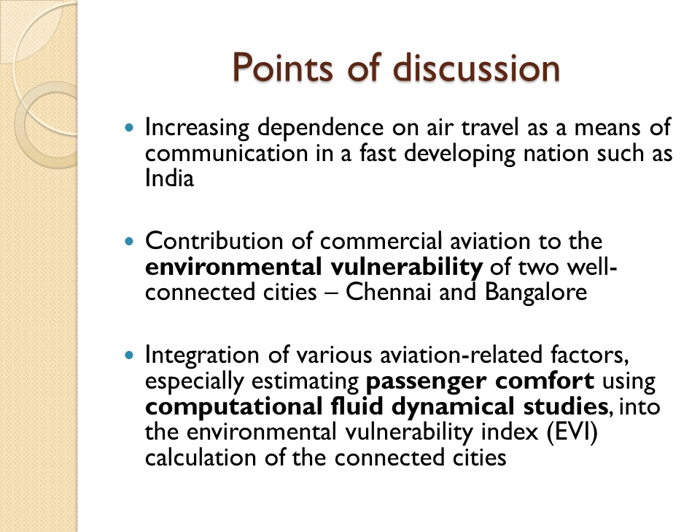In a fast developing nation such as India, there has been an increase in the dependence on air travel as a means of communication. Two well connected cities in India are Chennai and Bangalore. In this paper, we discuss how aviation related factors influence the environmental vulnerability of the two cities, and how passenger comfort can be included in the study using complex computational fluid dynamical studies, which is the first of its kind to be performed. Chennai and Bangalore are two cities in the southernmost part of India. The flight time between Bangalore and Chennai, or vice versa, is 45 minutes or so.

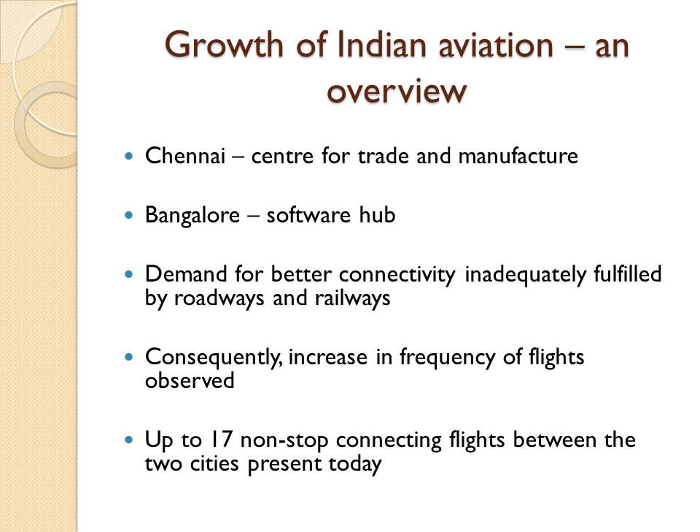There is a rising need for better connectivity between the two cities, Chennai and Bangalore. This is because Chennai is the center for trade and manufacture in the country, whereas Bangalore is a software hub. The demand for better connectivity has not been fulfilled completely by roadways as well as railways. Consequently, there has been an increase in the frequency of flights observed between the two cities. Up to 17 non-stop connecting flights are present today between these two cities.

This rising passenger traffic trend observed in both cities has resulted in an increase in the number of flights between the two cities, which has adversely impacted the environmental health of both these cities. This thus calls for an environmental impact assessment in order to examine the city's health due to the influence of aviation. This study delivers precisely this by using a modified environmental vulnerability index incorporating aviation related factors, which is depicted as a screening tool in this study.

An increase in the number of passengers traveling by air has resulted in passenger comfort being an important factor which airlines have to keep in mind. India, as many of you might know, is a monsoon driven country. We have the southwest monsoon for about 3 months of the year, whereas Chennai in particular bears the brunt of an additional northeast monsoon for about 8 to 10 weeks.

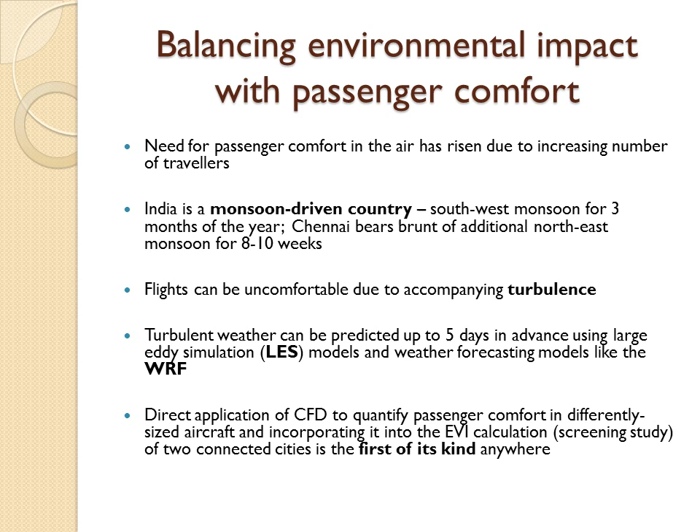Originally, the Environmental Vulnerability Index, or the EVI, was designed to quantify the vulnerability of a country or large bodies to environmental factors. There are 50 original factors used for this quantification. This original existing version of the EVI has been modified in the study to accommodate aviation related parameters.

The degree of vulnerability with respect to each indicator has been quantified as 1, as very highly resilient or least vulnerable, to 7, which is the most vulnerable. 7 out of these 50 given EVI indicators have been identified and used for this study, which have been influenced by aviation related factors, as we show later on.

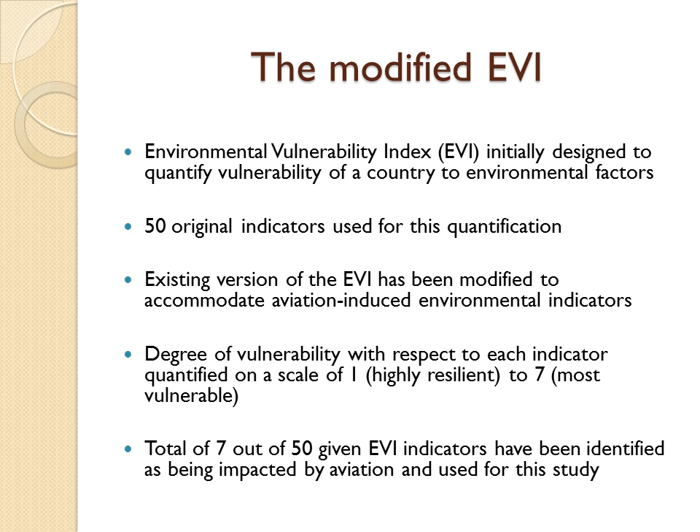As I mentioned earlier, the original EVI was proposed for large scale countries. However, quantifying the EVI of an entire country suppresses regional impacts of vulnerability within cities or states.

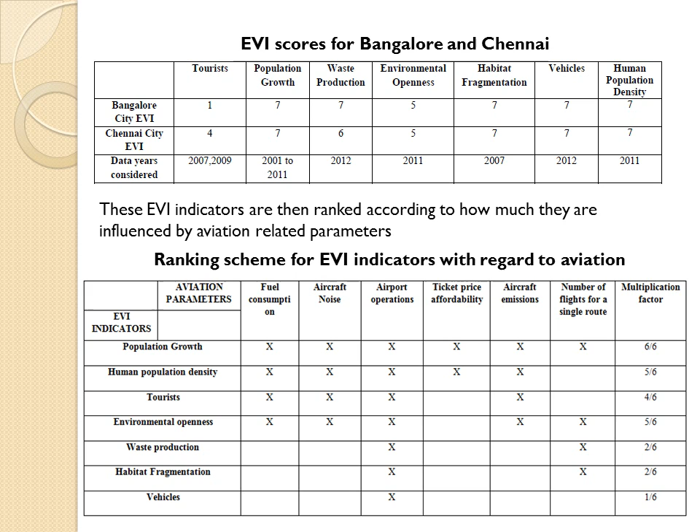given on the left. The final score shown by the multiplication factor is the number of aviation indicators influencing a particular EVI indicator. For example, all 6 aviation parameters influence population growth, which is an EVI indicator, and thus the multiplication factor assigned was 6 out of 6, which is 1.

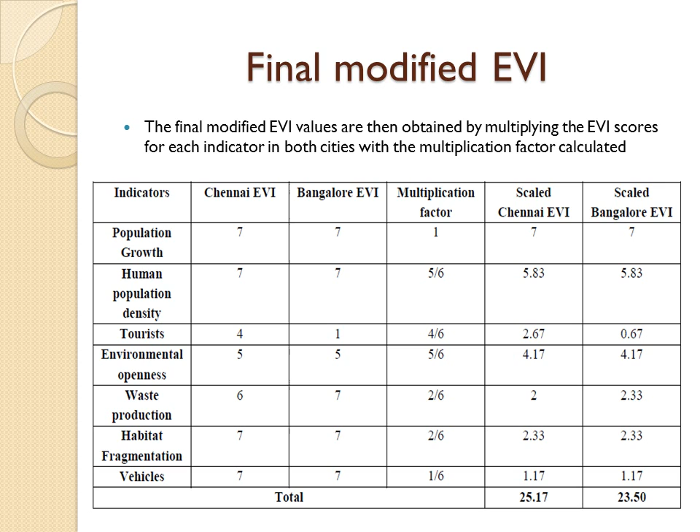The final modified EVI is calculated by multiplying the various multiplication factors obtained previously along with the EVI values for Chennai and Bangalore for the various EVI indicators. These scaled EVI scores are then added together to give the final scaled Chennai and Bangalore EVI scores respectively.

There are some telling implications of performing this modified EVI analysis. By reducing the impact of the aviation factors we observe on the EVI indicators, we observe that this reduces the environmental vulnerability of the two cities.

One possible way of achieving this is by reducing the number of aircraft operating on the route. This is possible by replacing a large number of small sized aircraft with a fewer number of larger aircraft.

This will ultimately lead to a reduction in the other aviation related parameters such as aircraft noise, operating costs, ticket prices, etc., and ultimately results in the reduction in the impact of most of the aviation factors on the EVI indicators. This ratio of smaller aircraft to be replaced by larger aircraft along this particular Chennai-Bangalore route is discussed based on passenger comfort. This is done by fluid dynamical studies as shown in the following slides.

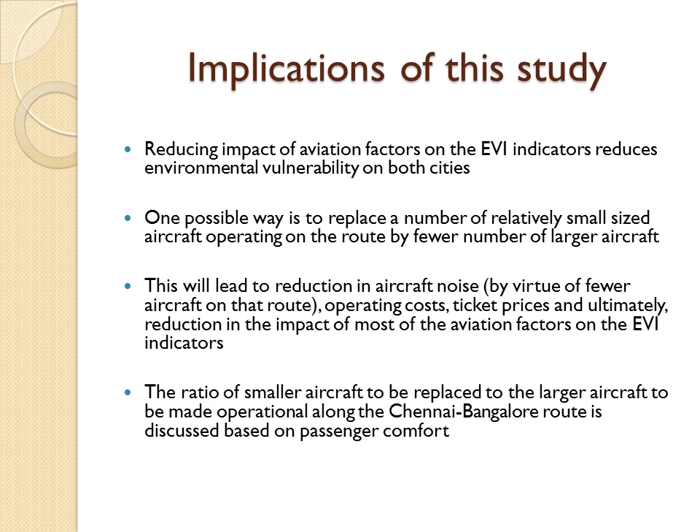In this section of the study, we introduce the aspect of human comfort in air travel. In order to understand the relevance of turbulence in commercial flights, it is necessary to perform a simulation of flow over a commercial aircraft. One of such commercial aircrafts operating on this Chennai-Bangalore corridor is the Airbus A320.

This simulation is performed with the aid of computational fluid dynamical software such as ANSYS CFX. In computational fluid dynamics, basically an iterative code is used to solve various fluid dynamical equations, mainly the Navier-Stokes equation, as well as other heat and mass transfer equations using boundary conditions which are input to the software by the user. A 1:33 scaled model of the Airbus A320 aircraft is used to analyze flow under ambient conditions.

One of the models used to estimate the type of flow and the various features is the K-omega SST model, which is coupled with a high turbulence intensity profile, and it is identified as the most suitable equation to analyze flow around the plane.

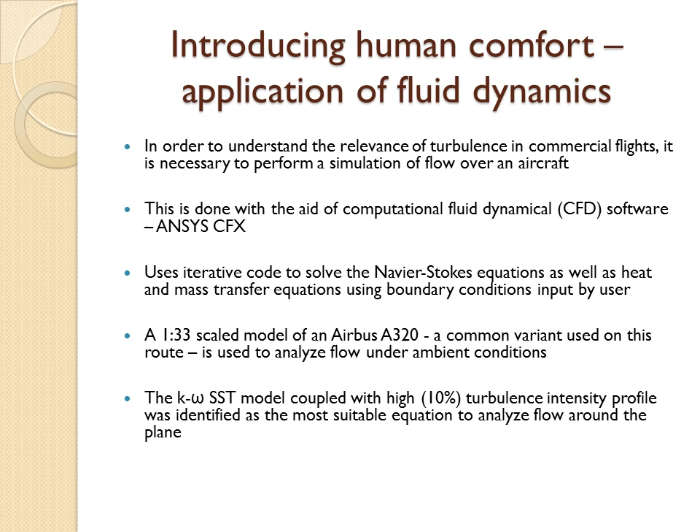Since the aircraft has to maintain a stable flight in the air, it makes sense that there is a higher pressure underneath the aircraft, that is below the wings, and a lower pressure above. This difference is observed clearly and is the reason for flight, as shown.

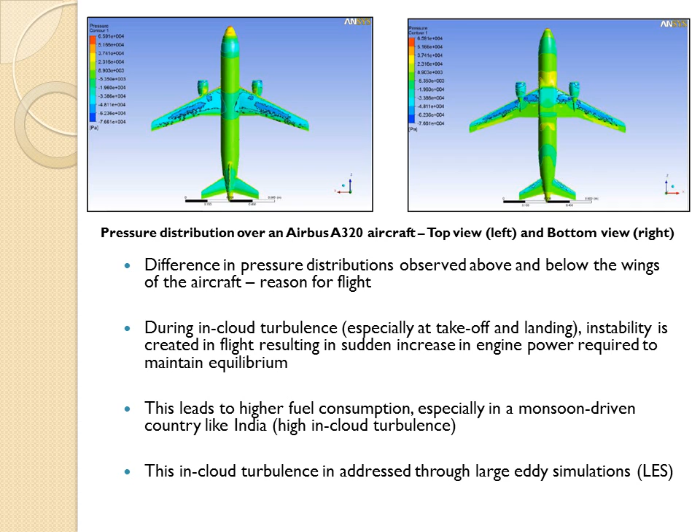During in-cloud turbulence, especially during the stages of takeoff and landing, high instability is created inside the flight, resulting in a sudden increase in engine power required to maintain equilibrium or to get back to equilibrium stage. This leads to an increase in fuel consumption at that moment, and this is more so especially in a monsoon-driven country such as India, where there is high in-cloud turbulence observed. This turbulence is characterized through large eddy simulations, which are showcased in the following slides within the cloud.

For this stage of the study, we use the UK Met Office large eddy model to compute large eddy simulations in order to determine the vertical velocity perturbations within a cumulus cloud, which is the most common cloud present at the particular height during takeoff and landing stages of the flight. Two different days in Chennai city are examined, one during a normal condition, a regular day, and another during extremely turbulent conditions such as during a cyclone.

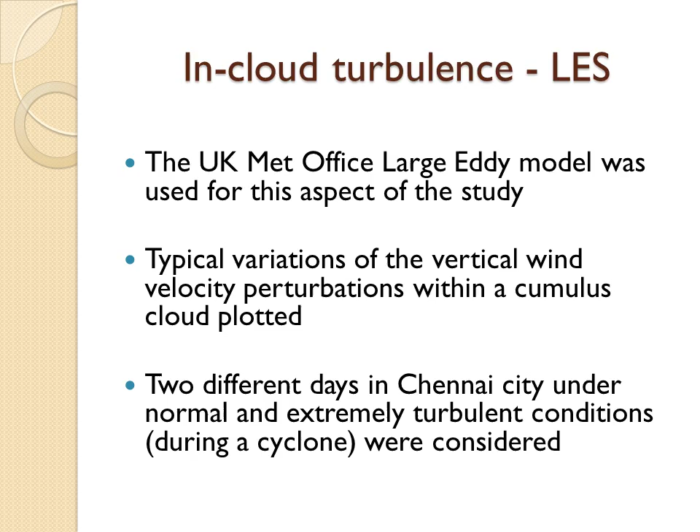The vertical velocity perturbations are consequently much lower for a normal day where there is less turbulence, and this is characterized by about 1.4 meters per second, whereas it is much higher, up to 2.5 meters per second during the cyclone Neelam.

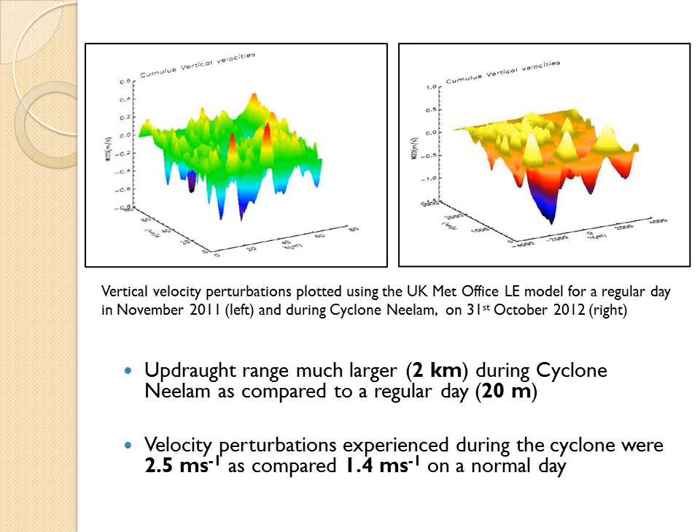Now there are some concerns for this present route that we are observing here. The total flight time, as mentioned earlier, is 45 minutes, and the time spent during ascent and descent, that is during takeoff and landing stages, is about 20 minutes or so. The aircraft spends most of this flight time passing through these examined cumulus clouds, and the vertical velocity perturbations observed during turbulence exist at a height of about 2000 to 5000 meters or so.

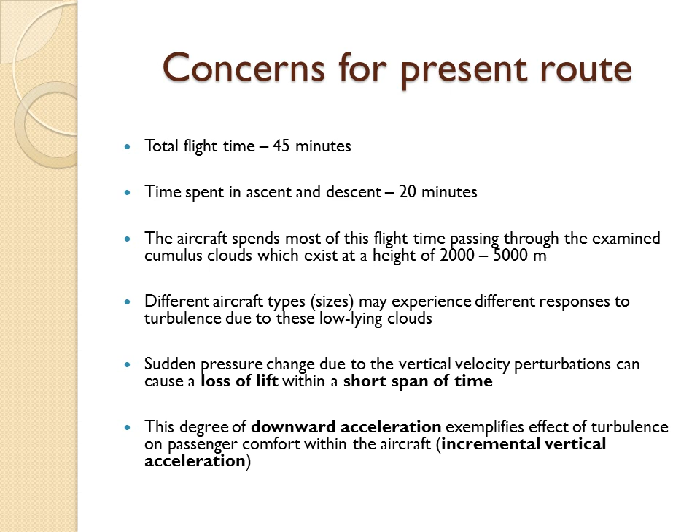Variously sized aircraft experience different degrees of turbulence due to these low-lying clouds. Sudden pressure change due to the vertical velocity perturbations may cause a loss of lift within a very short span of time, which is characterized by a very quick turbulent drop observed in most of the flights you may have taken. This degree of downward acceleration, or to give it its formal term, the incremental vertical acceleration, exemplifies the effect of turbulence on passenger comfort within the aircraft. This is examined further in the following slides.

The incremental aircraft vertical acceleration, given in units of g, that is the acceleration due to gravity, is calculated for both weather conditions seen previously for two differently sized aircraft: one a Boeing 737-800, which is a medium-sized aircraft, and the other an ATR-72, which is a small-sized aircraft. It is important to note that the degree of vertical acceleration has a direct dependence on the gross weight as well as the wing area, which are characteristics that differ completely for various aircraft.

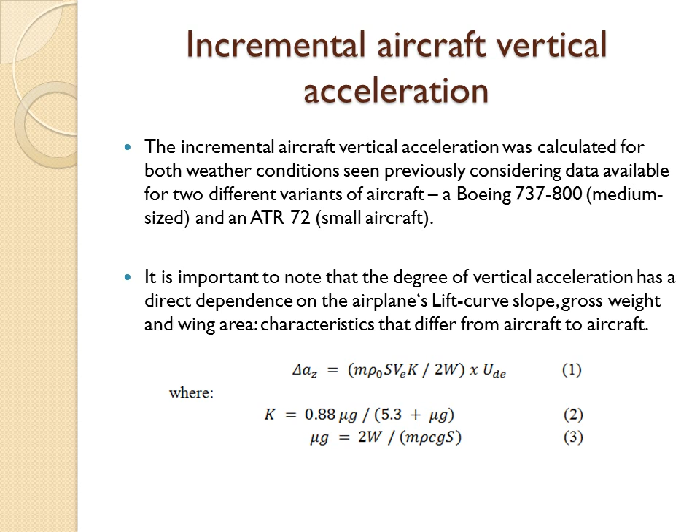The following equations shown here depict the calculations which are shown for clarity in the next slide in the table. The term we are primarily concerned about is delta AZ, which is the incremental vertical acceleration given in units of g. This is calculated for both the Boeing 737 as well as the ATR-72 during regular and stormy days. The various other factors and terms are defined clearly, and the values have been taken after detailed calculations which are not mentioned here for the sake of shortage of time.

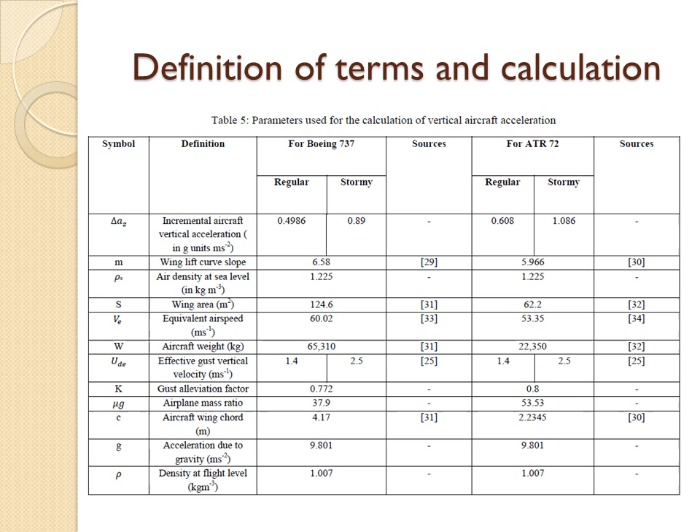There are a lot of implications of performing this calculation. The maximum vertical velocity perturbations discussed earlier, that is 1.4 meters per second as well as 2.5 meters per second for regular and stormy days, have been plugged in to find the maximum incremental vertical acceleration, delta AZ, for both these days.

These are found to be less for a Boeing 737 as compared to an ATR 72 for the same maximum updraft discussed previously. According to turbulence indicators, it was seen that the Boeing 737 experienced a comfortable flight on a regular day, whereas the ATR 72 experienced a moderate degree of turbulence.

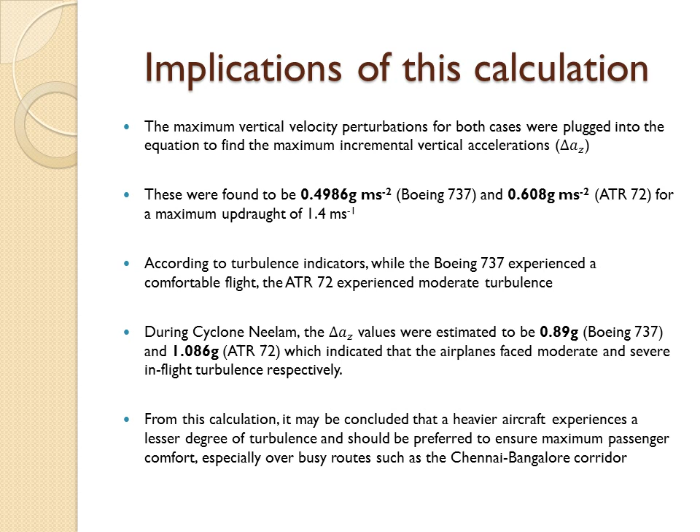During the cyclone Neelam, however, the Boeing 737 experienced a moderate degree of turbulence, while the ATR 72 experienced severe in-flight turbulence. From this calculation, it is concluded that a heavier aircraft experiences a lesser degree of turbulence and should be preferred to ensure that passenger comfort is given a high priority, especially over busy routes such as the Chennai-Bangalore corridor.

In this slide, we show the various low-cost domestic carriers operating along this route, as well as the various types of aircraft operated by them. The frequency of these flights are also mentioned here.

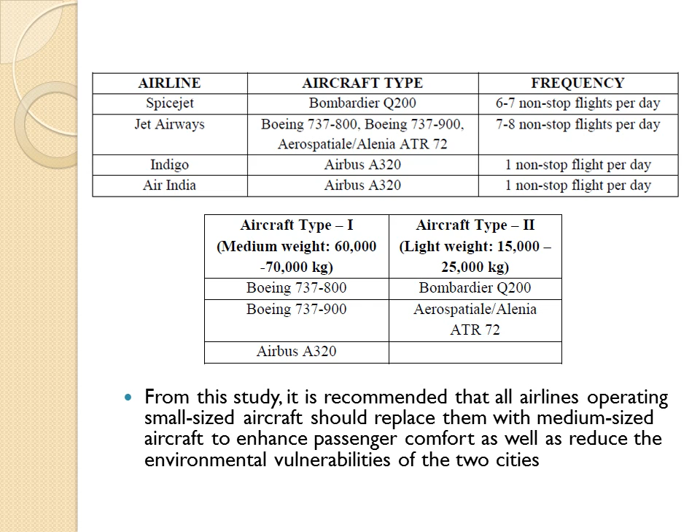As we can see, aircraft type 1, which are medium weight aircraft, can replace a larger number of lightweight aircraft in order to ensure that the aviation related parameters influence the EVI indicators in a lesser way. This enhances passenger comfort as well as reduces the environmental vulnerabilities of both the cities in question.

The other benefit of using larger sized aircraft is that large aircraft have lower environmental per passenger kilometer costs than smaller aircraft. For instance, we take the case of replacing a number of ATR 72s with a proportionate number of Boeing 737s.

From the literature available, it was estimated that the CO2 emissions from aviation fuel is estimated to be 3.15 grams per gram of fuel. By performing a calculation based on the number of seats present in each aircraft, it was determined that about 5 ATR 72s, which are the smaller size aircraft, can be replaced with 4 Boeing 737s by the low cost carriers.

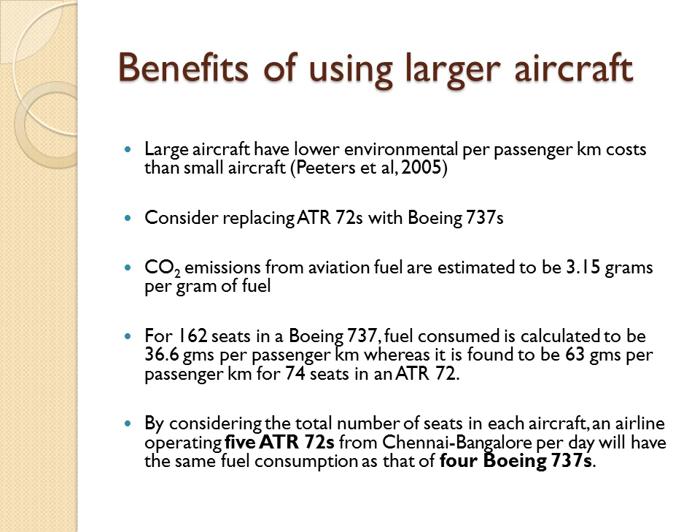Now that we have concluded that using a heavier aircraft has better consequences for the environmental vulnerabilities of both the connected cities, we try to quantify this by determining factors which help the selection of the aircraft type and weigh them against the final EVI values which have been obtained previously using the previous calculations. This is done in order to quantify the benefits of using larger aircraft in place of lighter ones, as seen in the following slides.

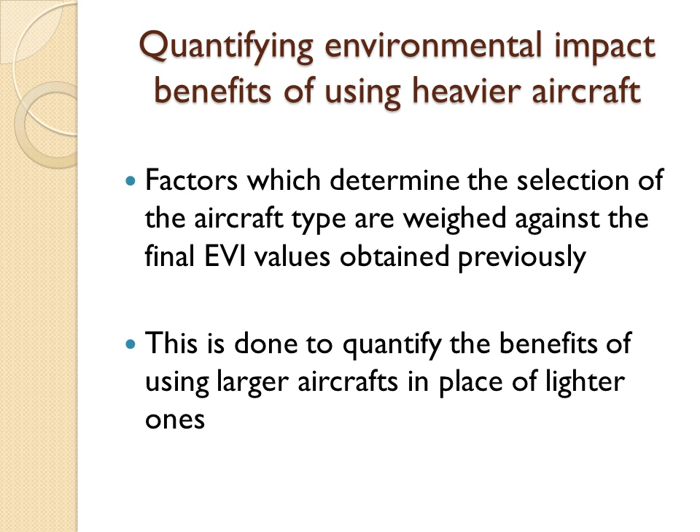In this slide, we observe the various aircraft factors such as carbon dioxide emissions, incremental aircraft vertical acceleration, travel time, airport congestion, as well as aircraft noise, and how they are impacted by using a lightweight aircraft, which is the type 1 mentioned here, and medium weight aircraft, which is the type 2.

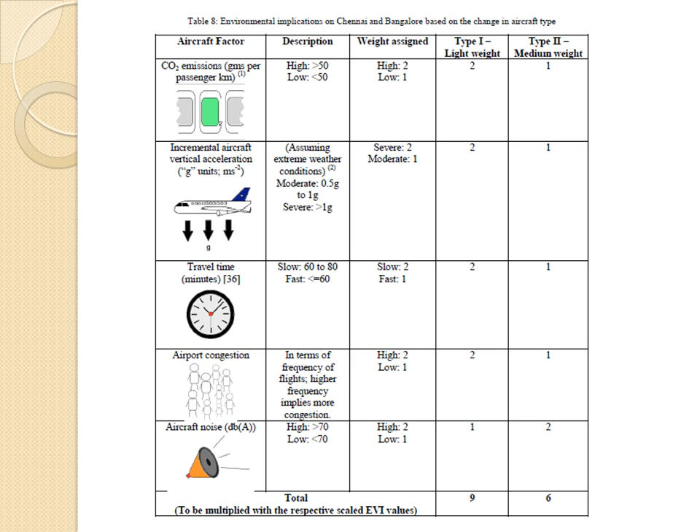The final values impacted on all these aircraft factors is summed up, and these final values are to be multiplied with the final scaled EVI values obtained previously for both the cities.

Once we have done this multiplication, we observe that the EVI of Chennai is about 226.53 when lighter aircraft are in use, while it is only 151 or so when a medium-sized aircraft is in operation for this route. Similarly, a higher value for the EVI is observed for Bangalore while using lighter aircraft, whereas while using heavier aircraft, this EVI value drops considerably.

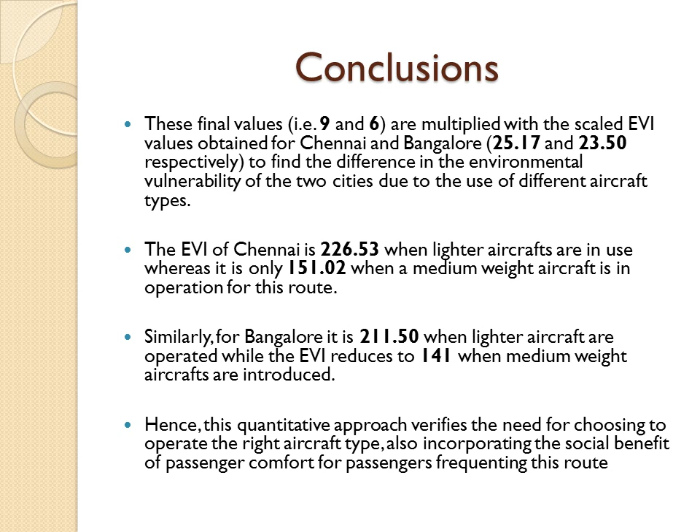Thus, this type of quantitative approach verifies the need for choosing to operate the right aircraft type while incorporating the social benefit of human comfort for the passengers who are frequently traveling along this route.

There are a number of wider implications of this present study. There is a need to prescribe vulnerability values for specific need-based environmental situations, such as air travel between two connected cities anywhere around the world. It is also seen that vulnerability should not be limited only to the physical environment. Overall comfort is extremely important, especially in the case of the aviation industry.

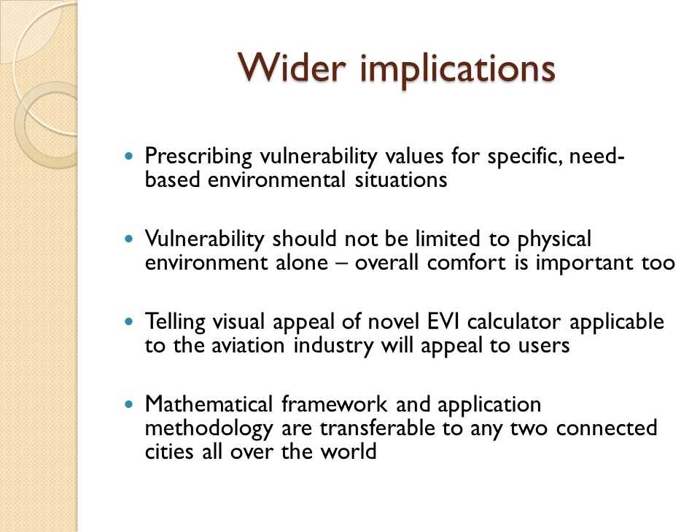Also, the novel EVI calculator depicts visual imagery using icons which will appeal to users in the aviation industry all around the world. While this is a particular case study, only to two connected cities between Chennai and Bangalore within India, the mathematical framework and the application methodology is transferable to any two connected cities all around the world.